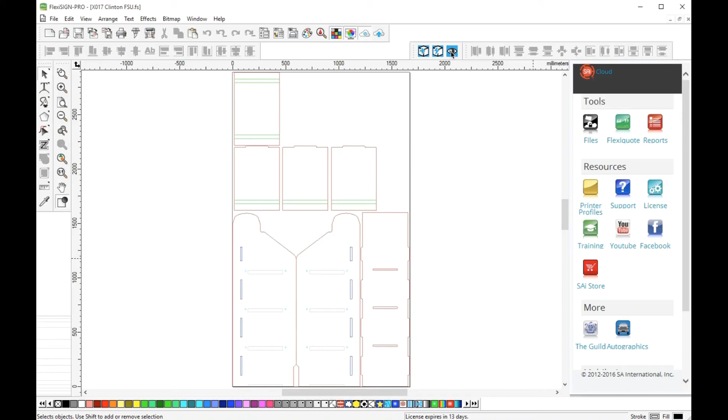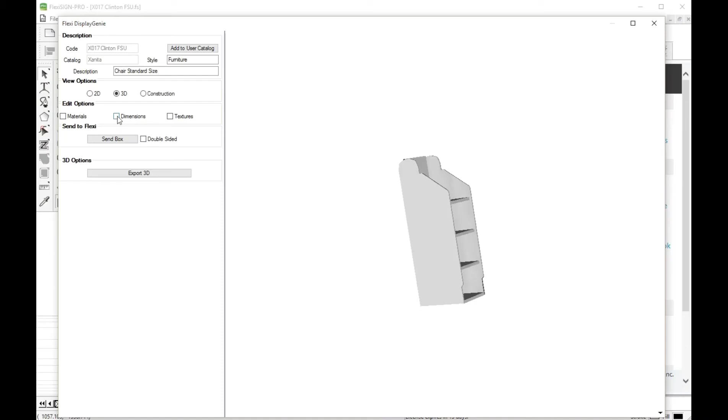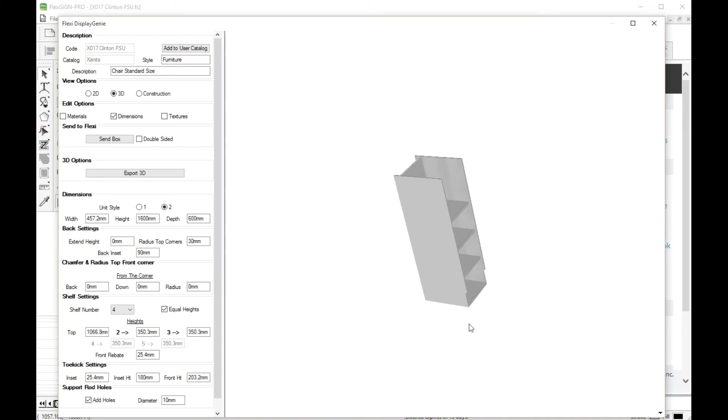This is the original design that Xanita board had, and it's made just like that. However, let's go to dimensions, let's just go to 2D. We'll go into dimensions, and you can see we have a number of things we can do here. We can change the width, the height, the depth, and the style, this unit style. This style here is the original design, but that may not be the design you want. So if you want to switch it to 2, it just gives you a squared off unit. If we go to 3D, you'll see it still has the shelves in it, but we'll go back to 2D and have a look at it.

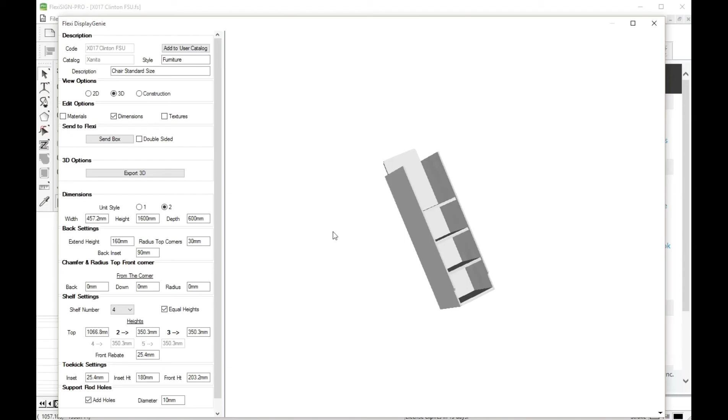So as I was saying, you can change the width, the height, and the depth of the unit. You can also extend the back if you want to extend it up higher than the unit. So we just set it up to bring it up a little bit, or bring it up a lot if we desire. Let's bring that back to 30. That gives you your radius ends, and when you do that in 3D, you can see the back sticking up above the sides of the unit, and that becomes important when you decide you want to do something with a display there.

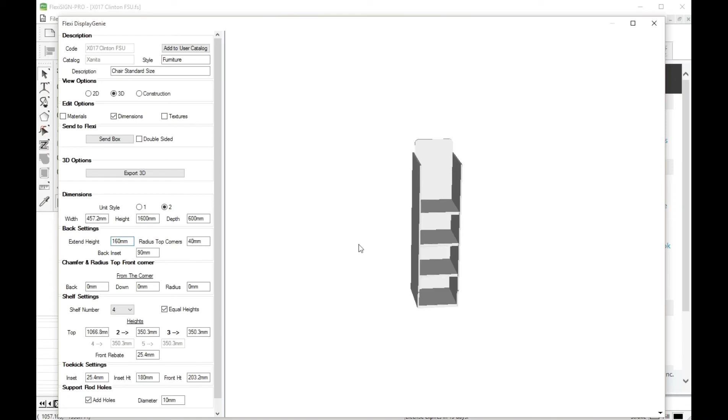You can also round those corners and change the radius on those corners that you have there. This back inset adjusts, I'll go back to 2D so you can see it, these slots here where the back panel fits in. So if you wanted to change it to, say, 60, that moves it back out so that you have less of a reveal behind there.

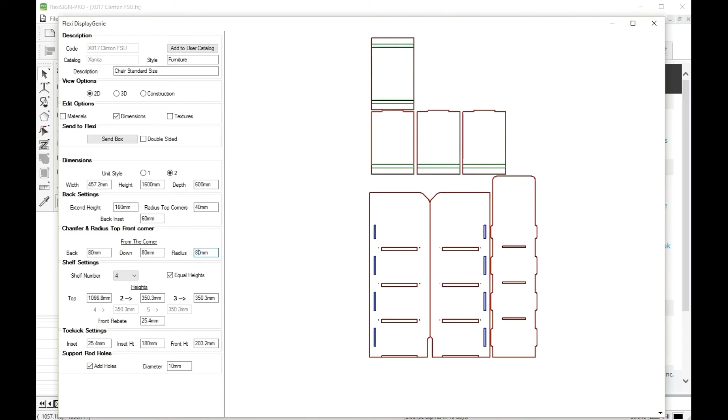Now, when you're in unit style 2, you can use this option here, the chamfer and radius, to chamfer or radius this front corner. So if I do, let's say, 80 on both of these, it will chamfer that corner off at a 45-degree angle. Then I can also take and put a radius on that corner. If I use the same dimension, it will be a 45 or a rounded over radius there.

If we go to 160, you can see you can get some very different reactions from the radius. We're just going to leave that to take a look at it in a little bit here. But you can also do these independently, so you could change one to 100 and leave the other one as it is on 80, and we'll get a different result. Let's make a bit bigger change. Let's go to 300. We can see we'll get a very different look on the front here. I'm going to change this to 480, and there you go. Now it's dropped down quite a bit, and you can see with that radius on there, it still gives a nice radius on these curves here.

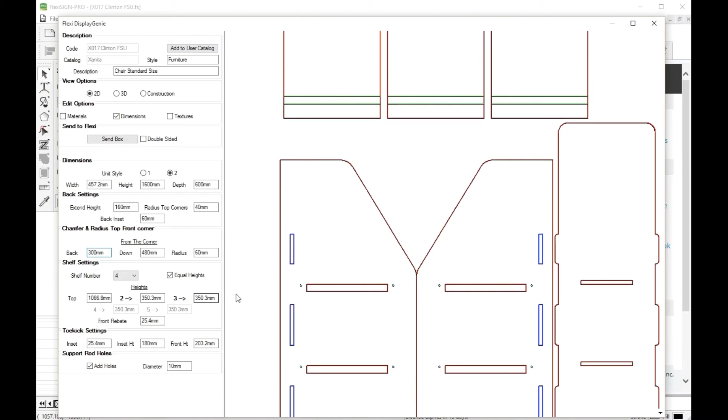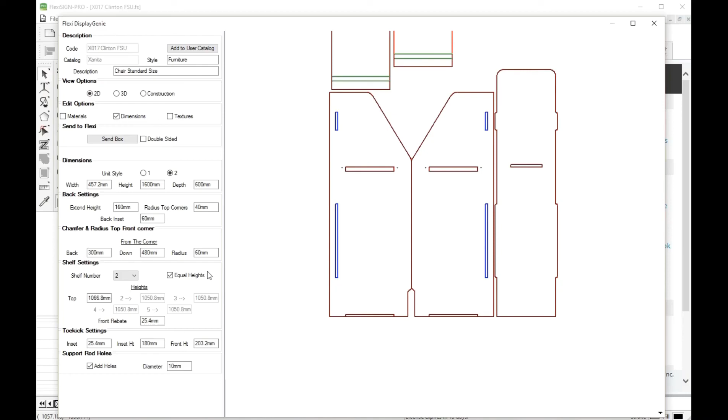The shelf settings, let's zoom out of this a little bit. In shelf settings, you can go between two shelves, which is just the bottom shelf and the top shelf. The shelf sets above the support here, as well as on the bottom it sets above the support. We also can select between that and 6 shelves. We can change, if we wanted to change the depth of the unit to, say, 500, and then the unit starts looking quite different than when we started out.

You can also adjust the rebate you have from the front to where the shelves begin. The toe kick settings are these settings down here. You can change the front height, which is the height all the way out at this front edge, and if I make that to 300, I can change that angle. Let's just do 253. You can see what that gives us. Not quite as steep an angle, but you can change that.

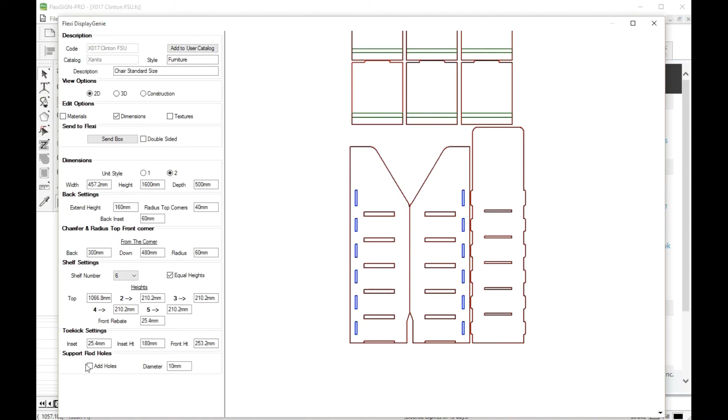And then the last thing we have on here is these support rod holes. These are for threaded rods that can go through there. And if you decide you don't want the holes, you can uncheck it and take the holes out, or you can change the diameter. I'll show you just so we can see how the holes are in there. You can put any size in there that you like, and that works like that.

So that's basically all the options that you have for this unit, and it's quite different. Let me just show you this thing here. Right now the shelves are set to equal heights. I can change that to where, let's say, this one I want 110. You can see I can change the heights independently, or when I click on equal heights, you're going to end up with equal spacing between the top and the bottom shelves. So that's about it for this unit.